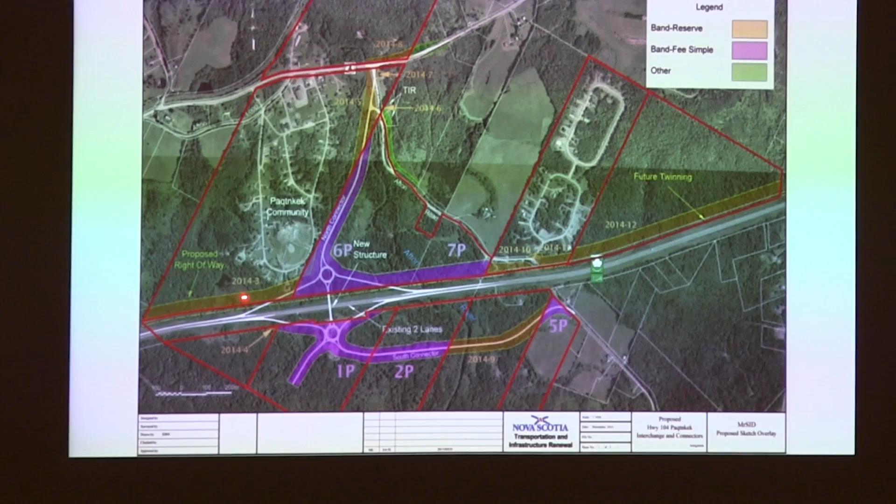The first one is the land around the main reserve, and the lands which are shown edged in red lines here are the reserve lands and lands which are owned in trust for the band. And the lands which are coloured in purple and in orange are the lands which are being acquired for this highway construction programme. There are some other lands which are shaded in green here, just smaller pieces, which are privately owned lands.

So to orient ourselves with this plan and the various colours, coloured in purple are the lands which will be acquired for highway construction from what we call the fee simple lands, the lands which are held in trust for the band, and the various orange strips and parcels are lands which are being acquired from the reserve proper. That's part of IR number 34.

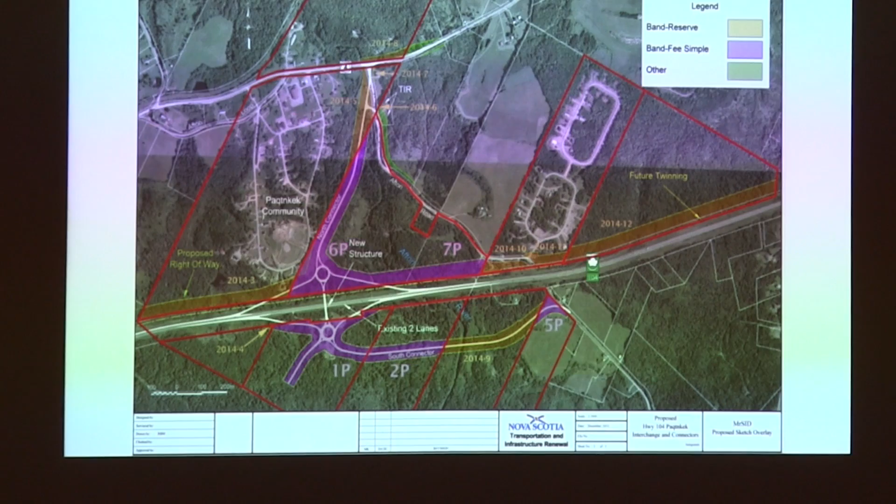And there is also a small acquisition of land from the reserve lands which sit separately close to Heatherton, and this is just for the road widening, and there are two small parcels close to the main Trans-Canada Highway.

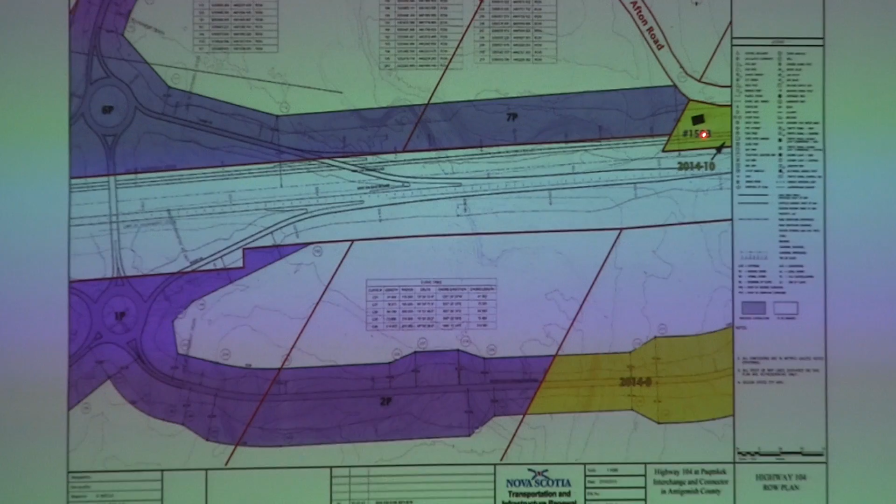And the next plan shows the central part of the land, again the interchange, and moving eastward to where Afton Road comes close to the Trans-Canada Highway, and again it shows the houses which are going to be impacted by the acquisition. And this plan is of the same area, showing the Afton Road where it crosses over the existing Trans-Canada Highway, and several homes here which fall within what will be the new highway widening alignment, and the homes which fall just outside of the new alignment, and this is in the area of the Fetow Loop development.

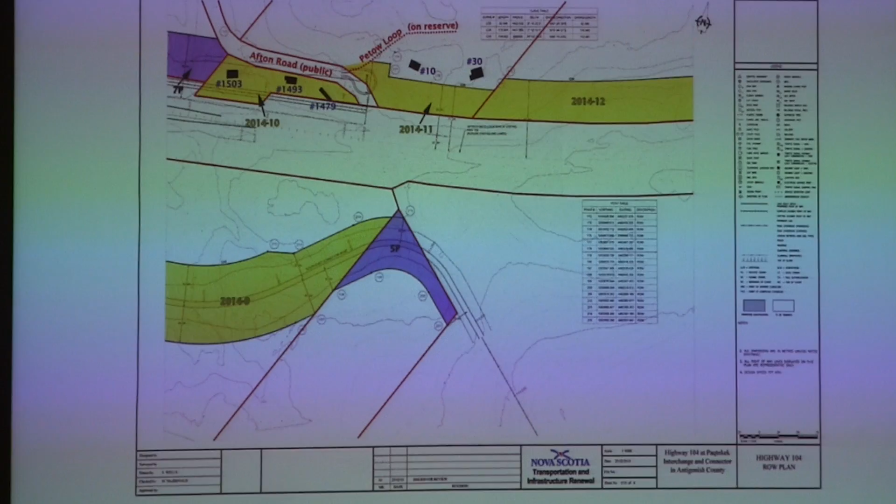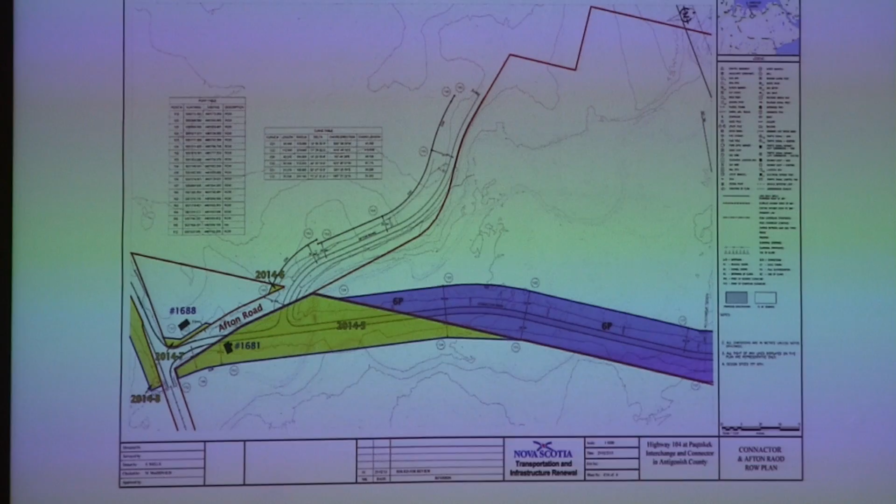And then at the northern end of Afton Road, where it meets trunk number 4, the land acquisition here will be for the connector road between trunk 4 and the new highway. And there are 2 homes which are in the vicinity here, one of which lies squarely within the land to be acquired, and one which sits just outside. And again, this shows from a different perspective the land which will be taken at this interchange of trunk number 4 and Afton Road for the intersection improvements.

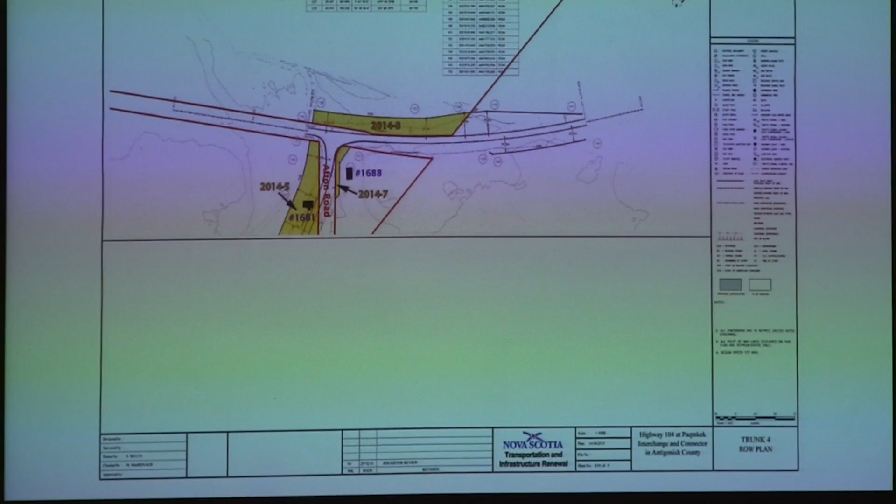I think it's important that I give an overview of the compensation principles and a general overview of the claim and how we proceeded to put together our compensation estimate. And as I said before, the compensation has been calculated under the Nova Scotia Expropriation Act, and the various heads of claim, statutory heads of claim, which are specifically written into that act are market value, or alternatively a home for a home compensation, and I'll speak about that because it does have some relevance here.

Secondly, injurious affection. Thirdly, what's called disturbance, and fourthly, what's called special economic advantage. And we'll be looking at each of those compensation heads of claim in turn. The only one which does not apply in this case is special economic advantage, because there is no legitimate claim for that in this particular case.

In terms of market value, there is a standard definition of market value which presumes a willing seller and a willing buyer, and it's intended to be the price at which real estate will transact in an open market. And it presumes normally a fee simple interest in land.

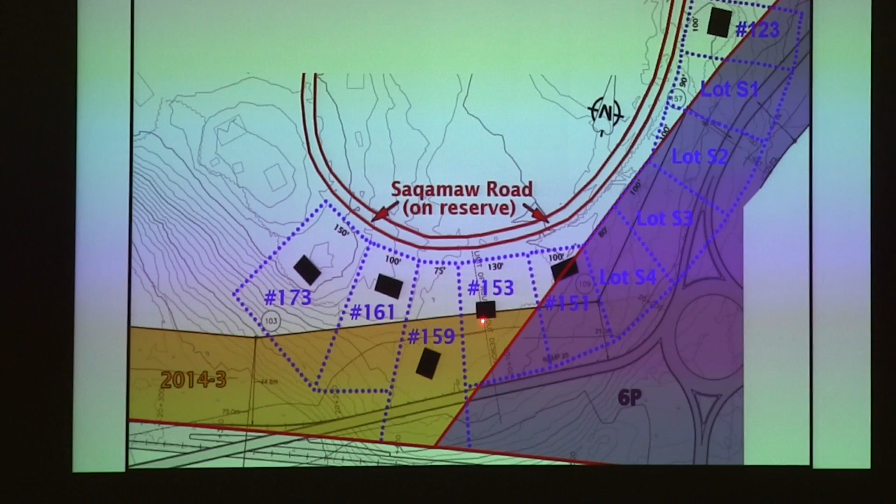They would fall within the home for a home category, and there are homes which are so close to the boundary that they will suffer injurious affection. One is number 123 and the other one is number 161. The one that falls just outside is number 173, which is also fairly close to the new boundary, but there are some steep slopes in the backyard there which will offset any real negative impact of the new boundary in its proximity to the house.

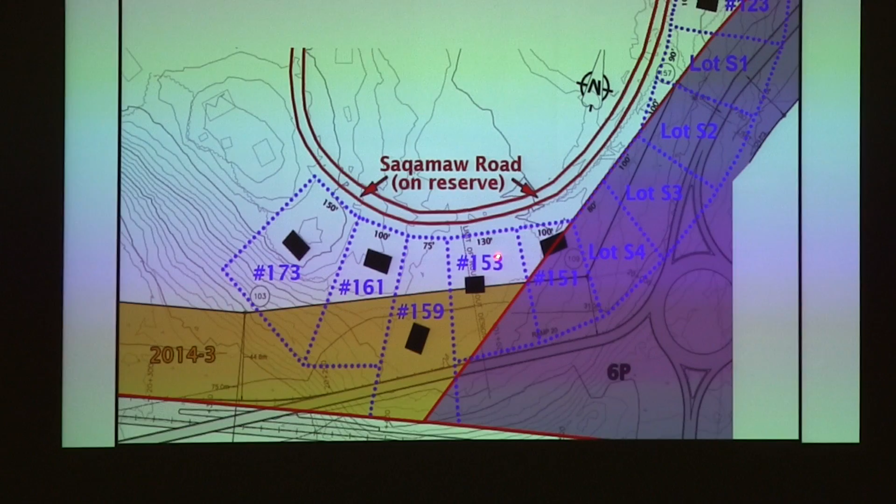The complexity of the valuation and the need to break out the compensation between its various components is probably best illustrated by number 153, where the house sits partially within the highway boundary, so it's a home for a home claim, but part of the land shaded yellow is within the fee simple lands, and part of it sits within the reserve land proper. There is also the white area remaining which will not be acquired and which will remain with the band, but it has no subsequent value. It's too small to build on. And so there's an element of injurious affection to this component of the land.

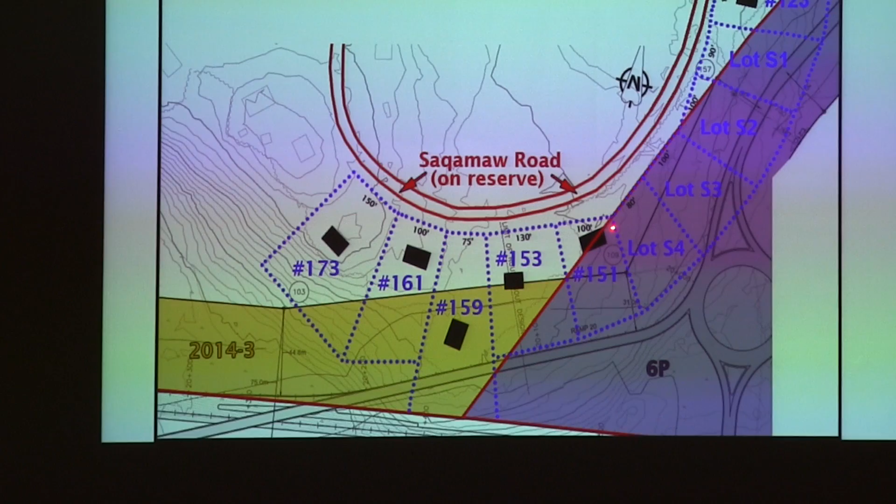Now what we've created here, because the reserve is not subdivided into building lots in the conventional sense, we've looked at what land would be required to support each of these individual homes and created simulated lot boundaries that would meet current day regulations and meet market expectations for lot sizes and dimensions. So we've created individual lot boundaries for each of the homes.

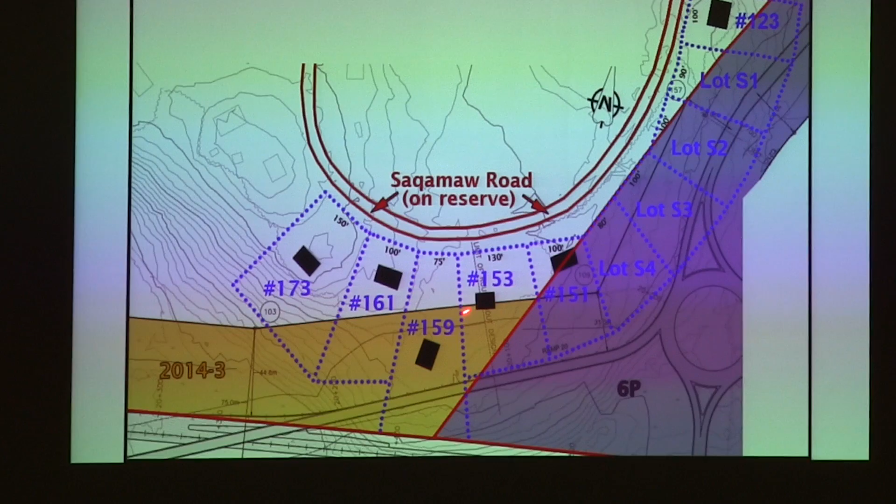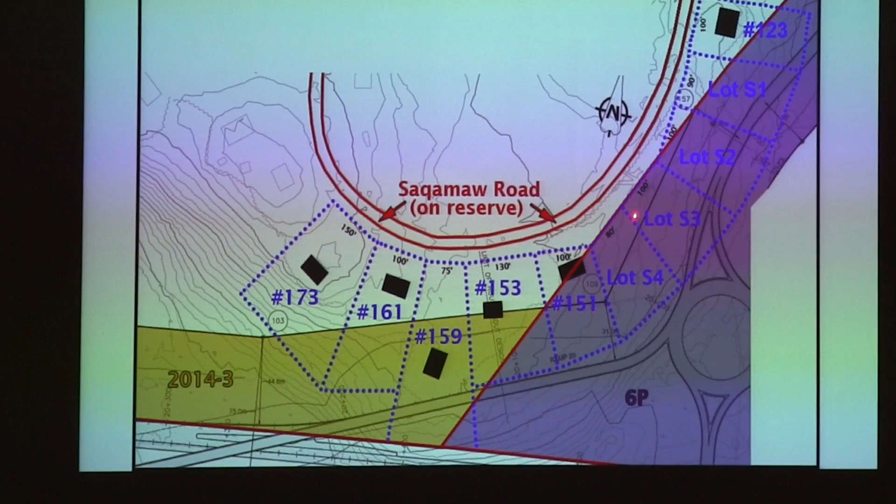We've also looked at the land in between the various homes which has not yet been developed but which has road frontage and could potentially be building lots at some time in the future. And this is important for valuation purposes because it helps us to isolate values for building lots as distinct from just general acreage lands which have no genuine development potential in the immediate future. So by doing this we can isolate and pinpoint values for specific parts of the land which are affected by the acquisition.

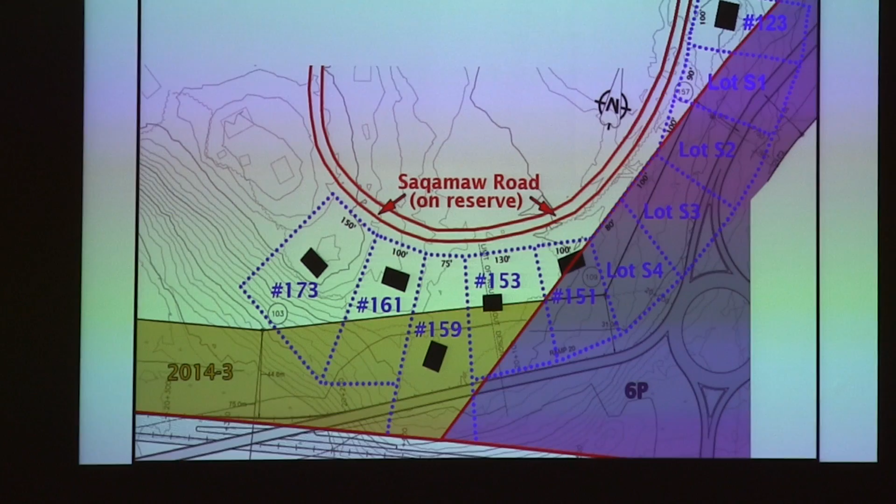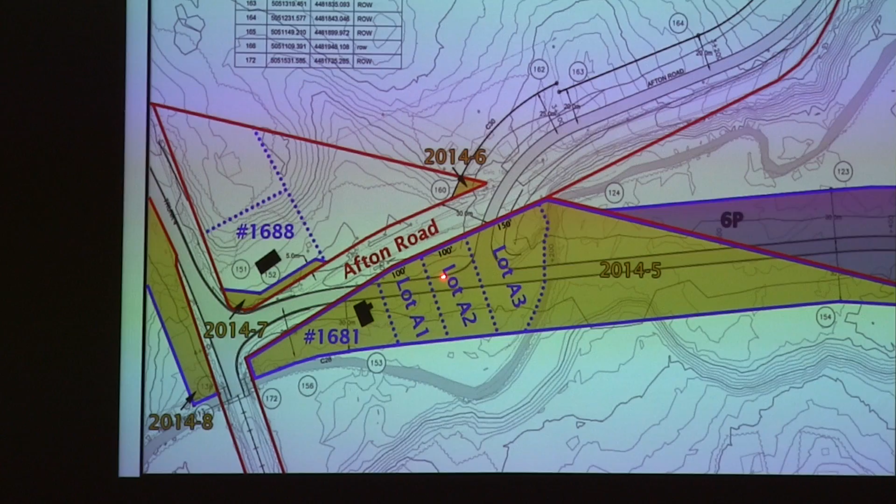This is the second pinch point, and this is at Afton Road where it meets Trunk Number 4. And again we've shown the houses which are either within or just outside the new highway or road boundaries. And we've also identified here 3 potential building lots which lie within the new road corridor, which could potentially have supported buildings that could have been developed as building lots in the past. So there are individual values calculated for these 3 building lots, in addition to the home for a home compensation for the house itself.